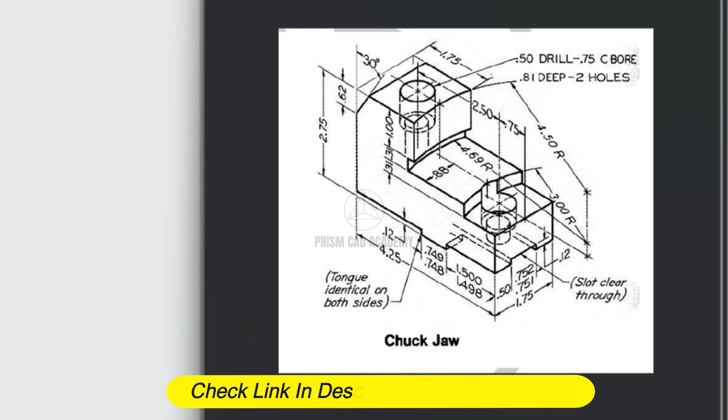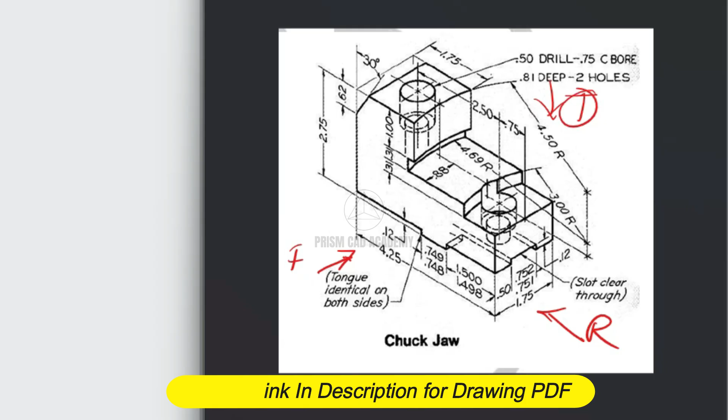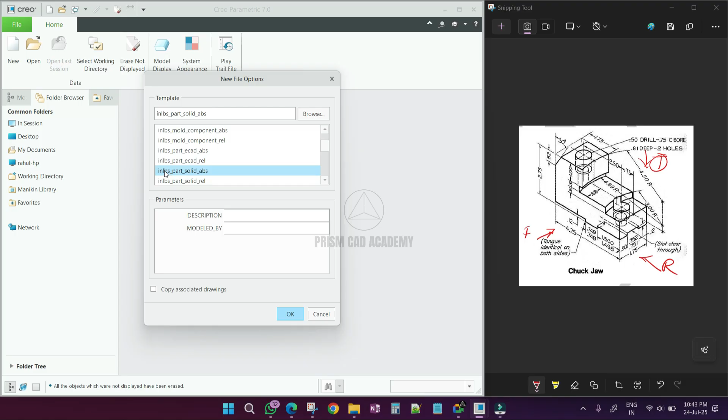Kindly check. So firstly we are going to locate views in drawing. So this is front view, right view and lastly top view. After that, select new command, select part file, chuck jaw, click OK, then select template. Now here dimensions are in inch, so we have to select IN, LBS, part solid ABS.

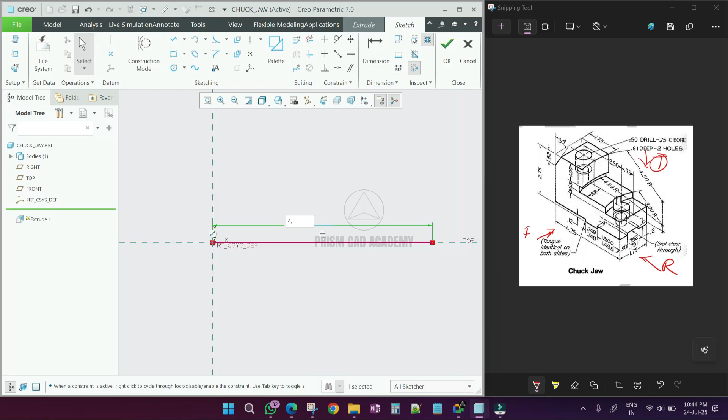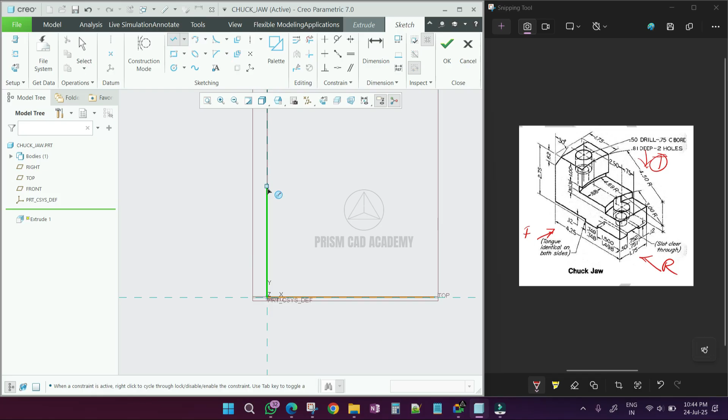So always try to draw outer geometry first. So horizontal line, baseline has dimension of 4.25. Then vertical line has dimension of 2.75. Then again horizontal line 1.75. Again the vertical line is 1 plus 0.31.

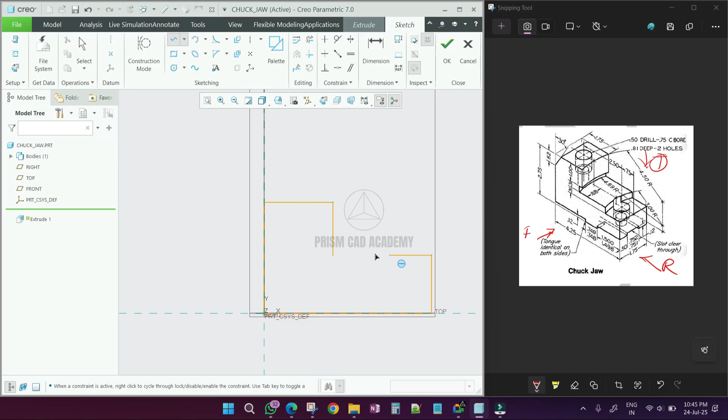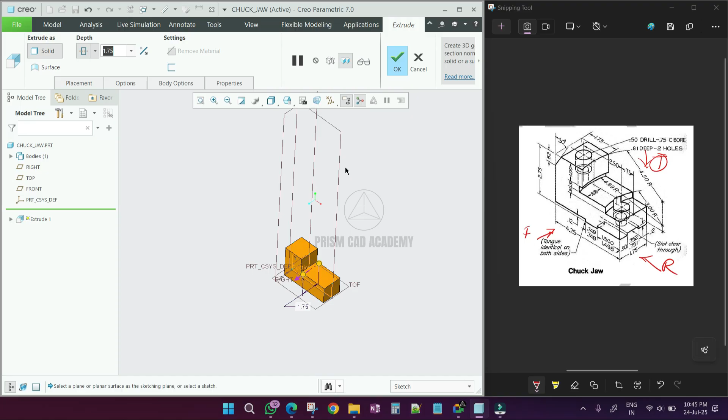Now again this vertical line. Complete this loop, click OK and make bisymmetric extrude having width of 1.75. Click OK. Now the overall geometry is obtained. Now we have to make cuts in it. So firstly we are going to cut the R3 cut.

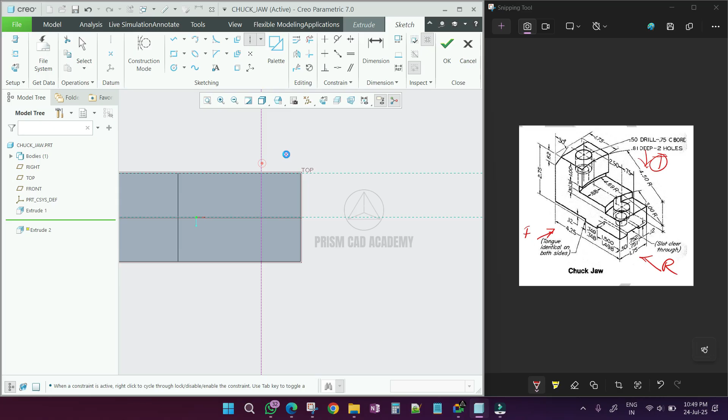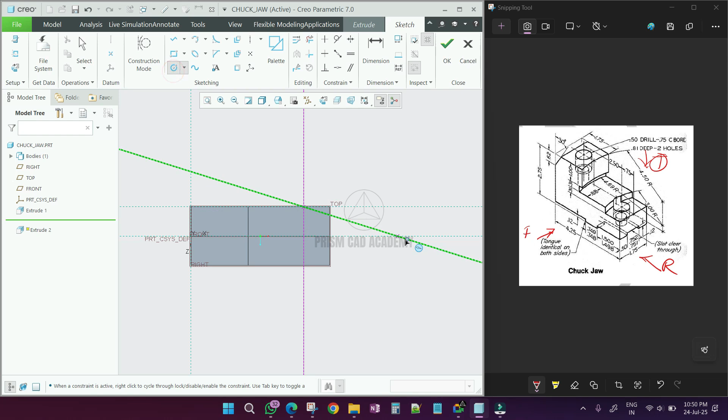For that I am locating the center for R3. Now draw R3 circle. And remove the material 0.31.

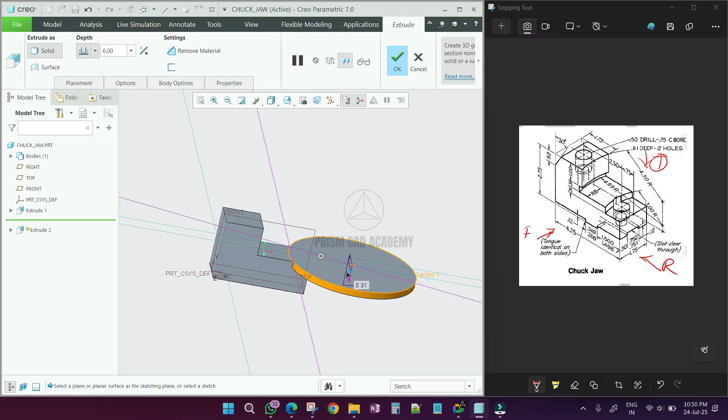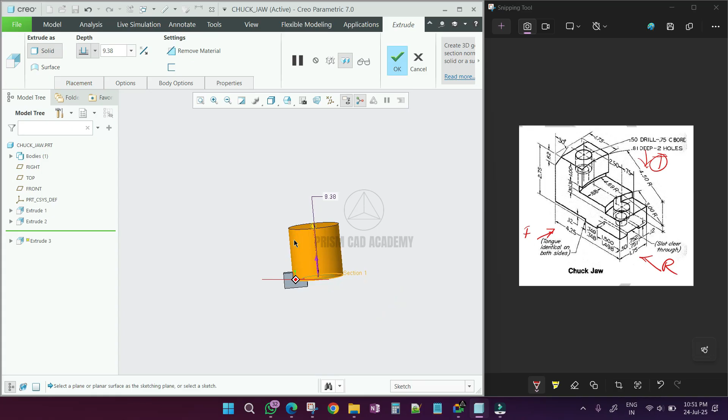Okay, now we are moving to second cut. Here is 4.69. So draw a circle with same center, which is radius 4.69. Remove the material 0.31.

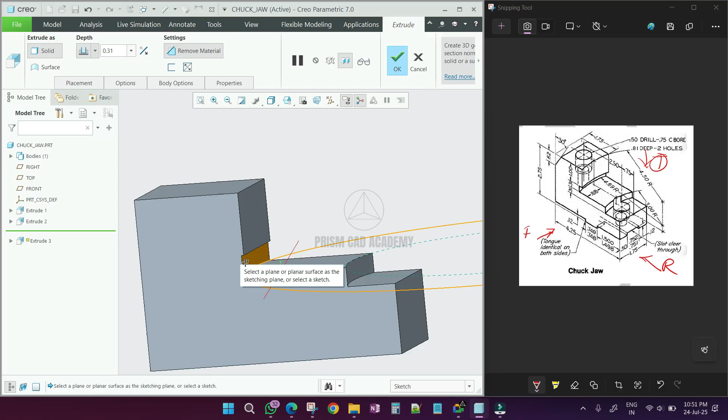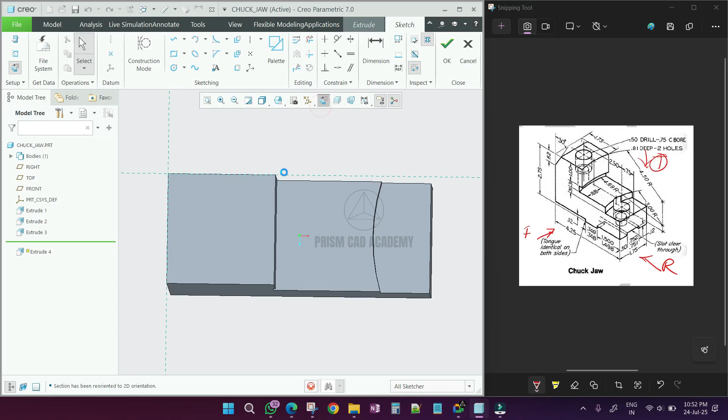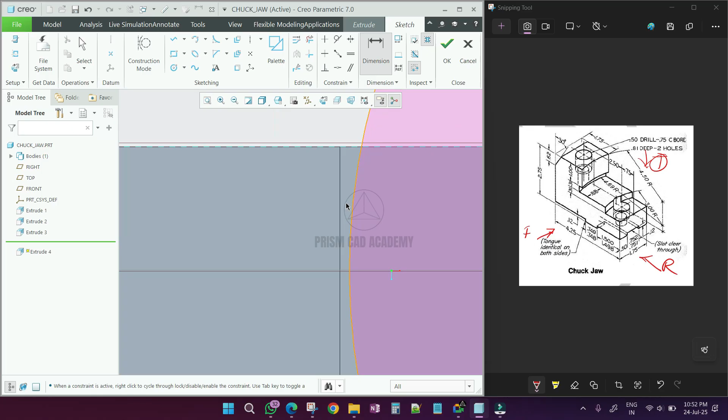Now again we want 4.5 radius circle cut. For that we have to use same center and draw 4.5 circle. But here the material is less to remove material from here. So first we have to add material here by giving some extra dimensions. So here is 1.75. We'll make it 2.

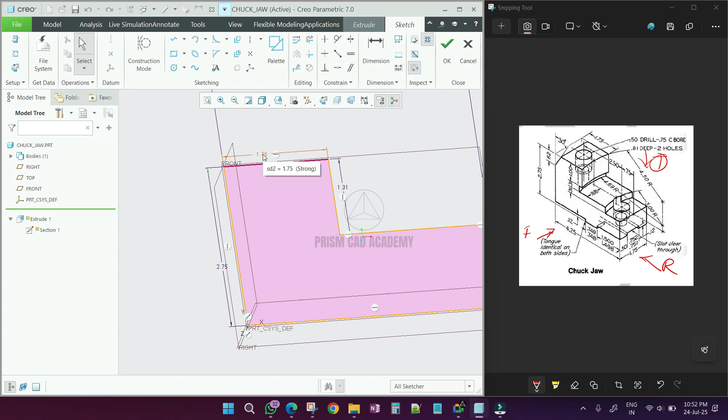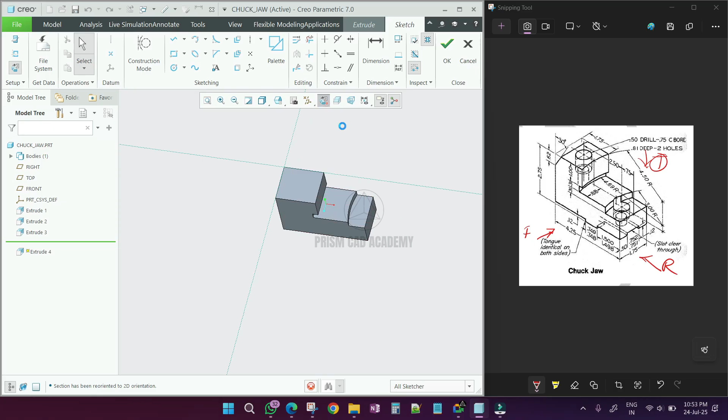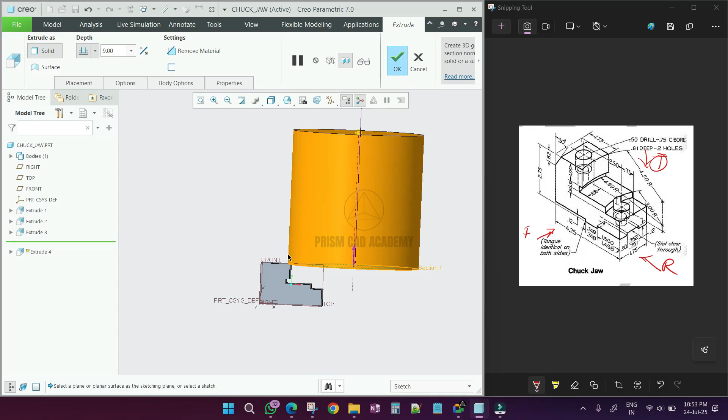Okay. As the material is added, now we are going to remove the material from here. Okay. Now select up to selected option and remove the material. Now we got the overall cuts here.

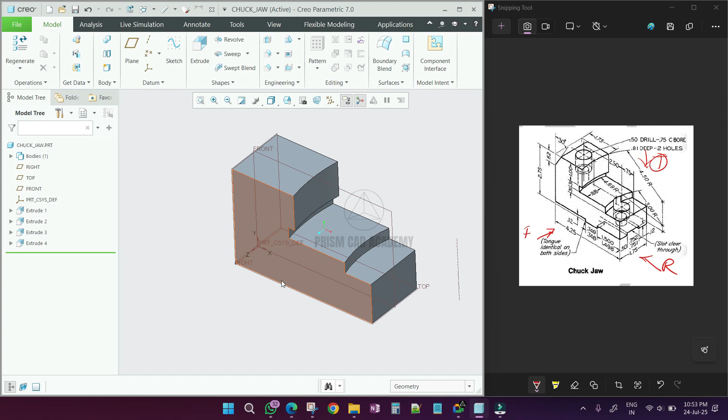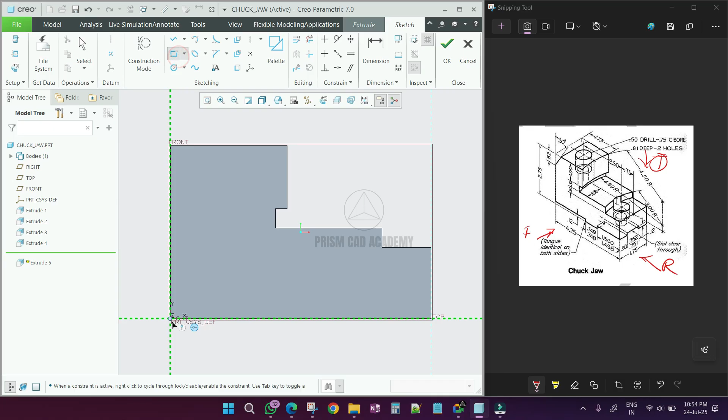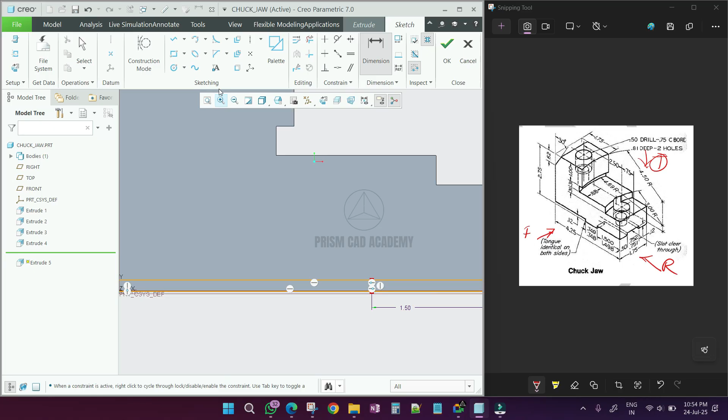In front view there is a cut. For that draw a rectangle having height of 1.12. Give the cut dimension 1.5 here, and the material we have to keep here is 0.75.

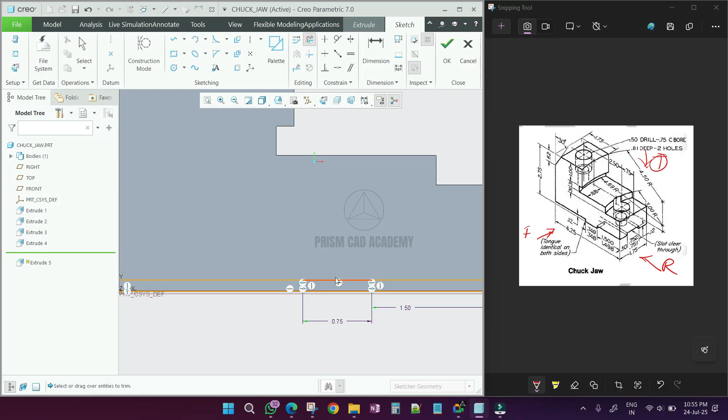Okay, so delete segment from here. And remove material from this side. Now one more slot is here from right side view. So select right side surface.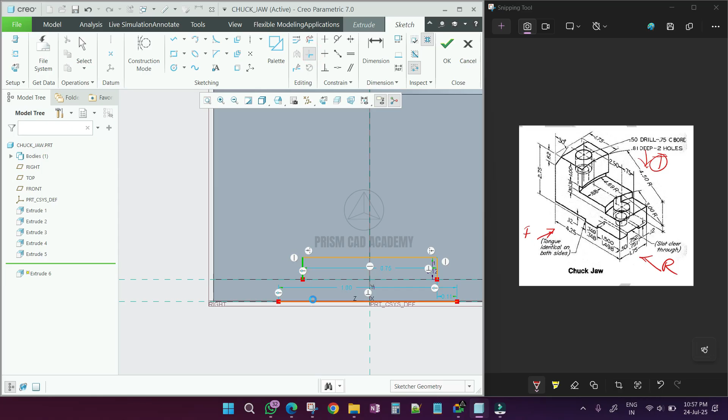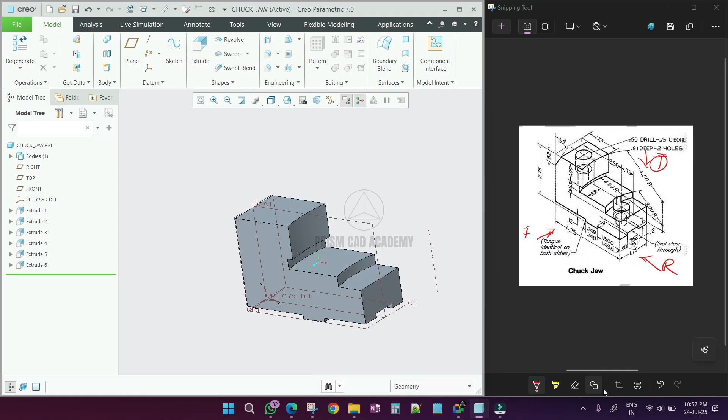So remove this material from here. Now our model is almost complete. Just we need to add some holes here. So here are 2 holes having dimension of 0.5 drill, 0.75 counter bore, 0.81 deep.

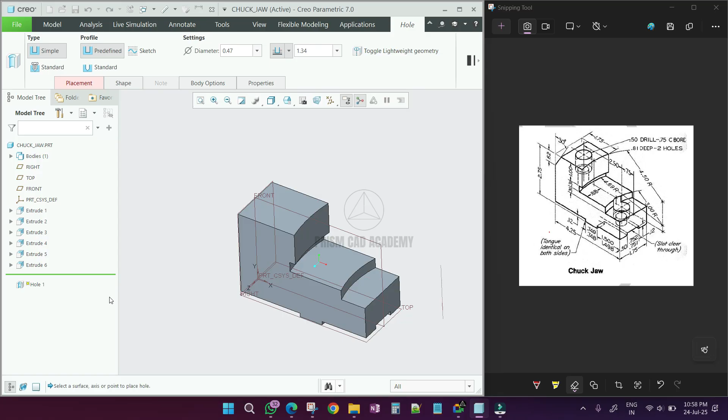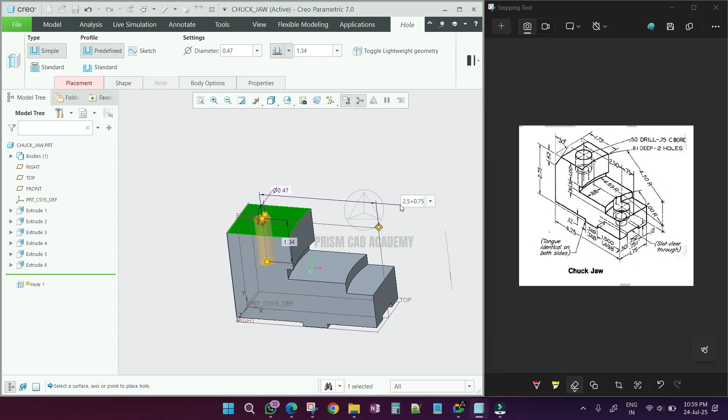So just go to hole command, locate the hole position by giving XY dimensions. So this is from this surface. So this would be 2.5 plus 0.75, and this will be 0. Okay, so now we locate the hole position.

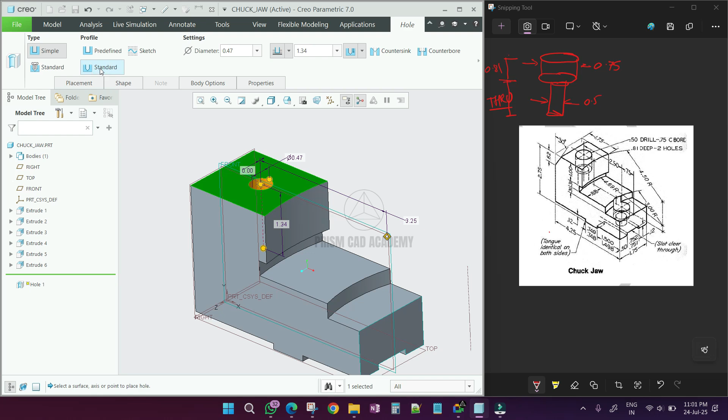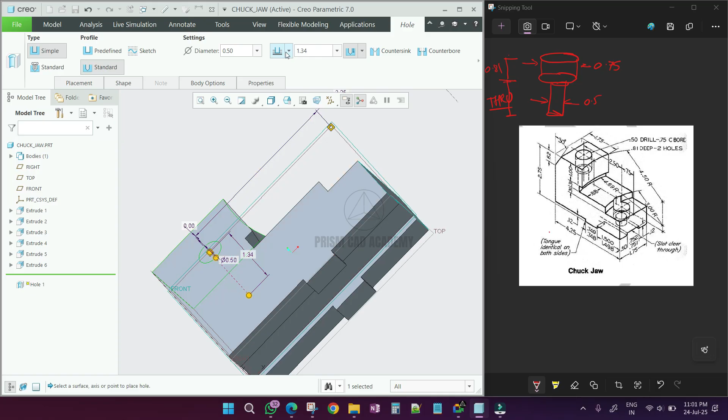Now we are going to create actual profile of hole. Click standard here. The other option we unlock. So drill will be 0.5, which is up to through surface. Okay, then select counter bore option.

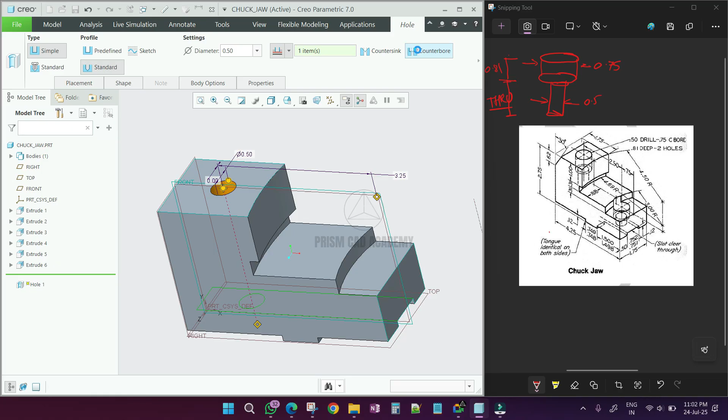Now go to shape. You can check your dimension here. So counter bore would be 0.75 and the counter bore height will be 0.81. Okay, in this way you can get this profile. Click OK.

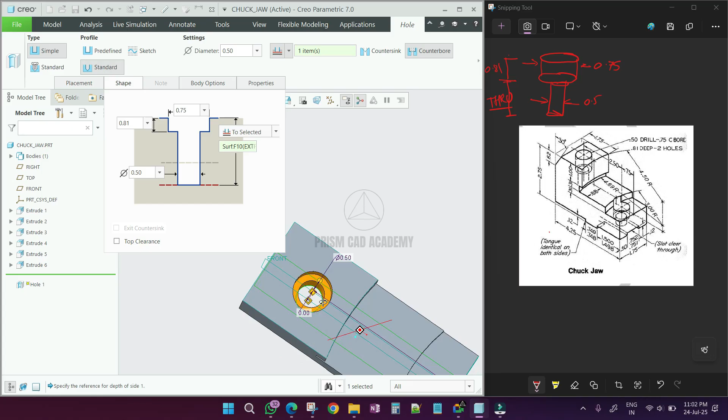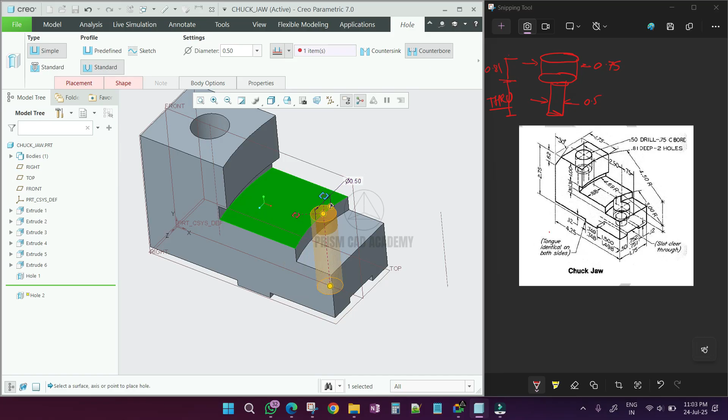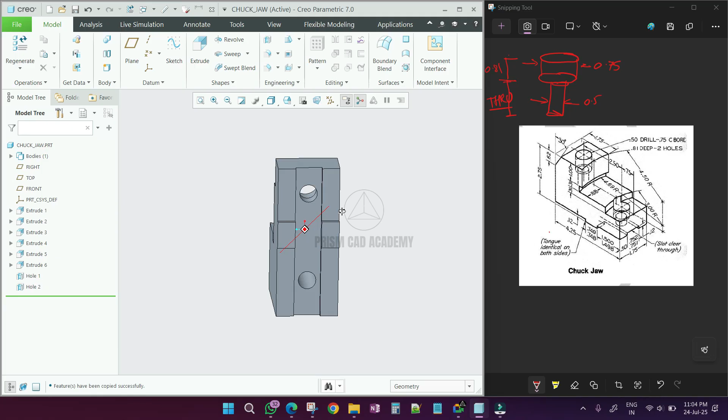Now the chamfer is pending. For that, go to chamfer, select that edge. Here angle is 30 and the dimension is 0.62. So in this way you can get the chamfer.

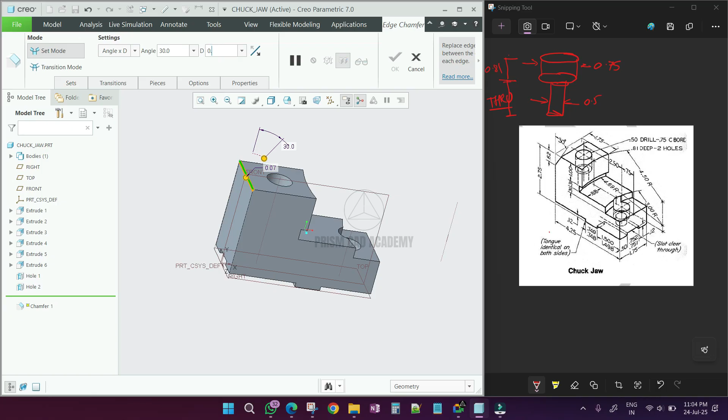So guys, the model is done. In this way you can create this model.